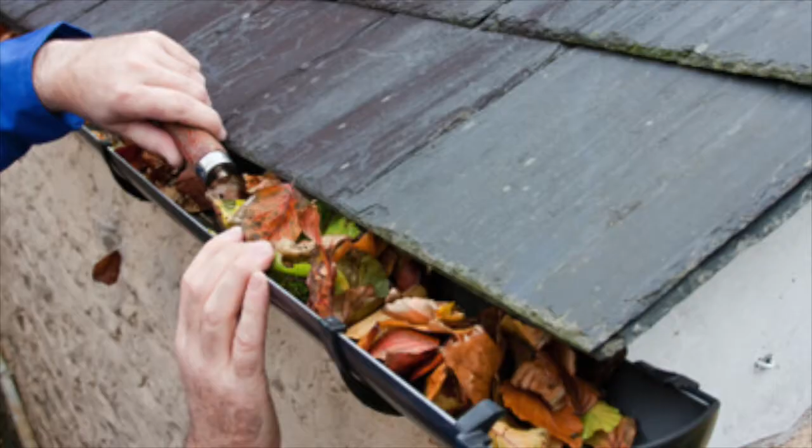Driving down the highway, we never stop to think what makes it possible for us to be where we are - the guide rails that keep us safe from oncoming traffic, the signs above us that guide us in traffic, or the very vehicles we're sitting on. When we're at home on our trampolines enjoying ourselves, when we see a baby walking around on a stroller, what supports them? What is it that modern things have in common that allows them to be what it is that they are?

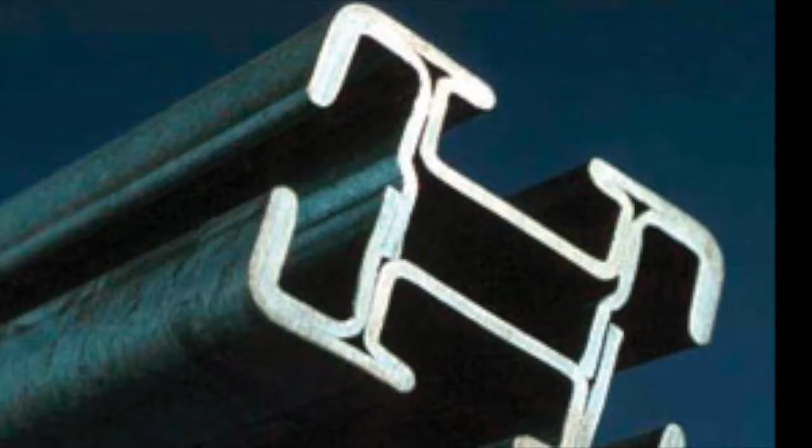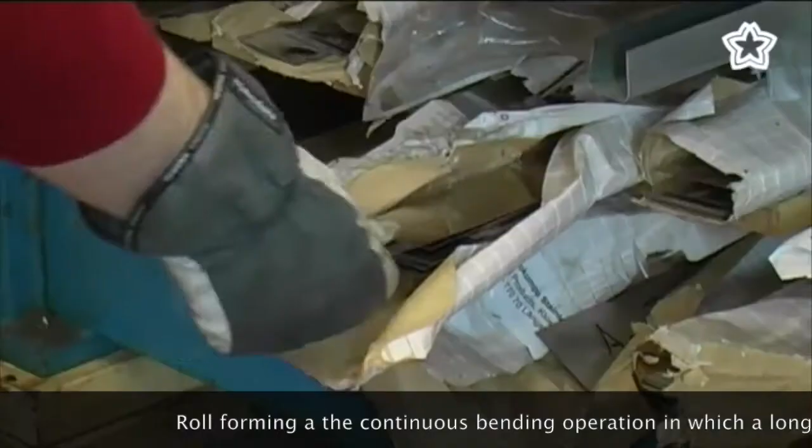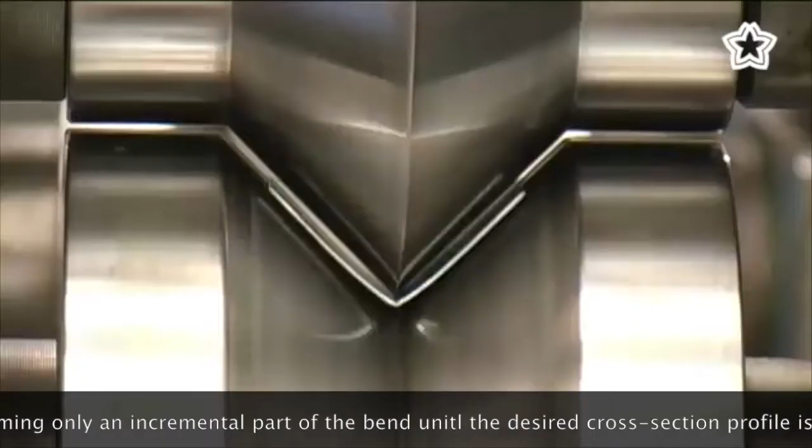Roll forming is a continuous bending operation in which a long strip of sheet metal, typically coiled steel, is passed through sets of rolls mounted on consecutive stands, each set performing only an incremental part of the bend until the desired cross-sectional profile is obtained.

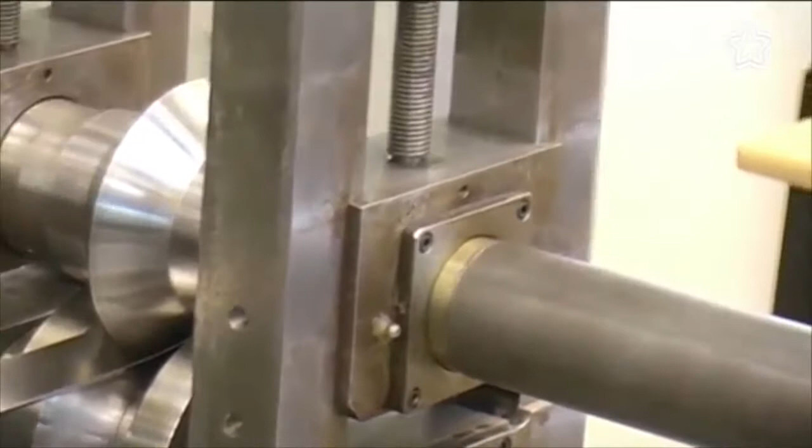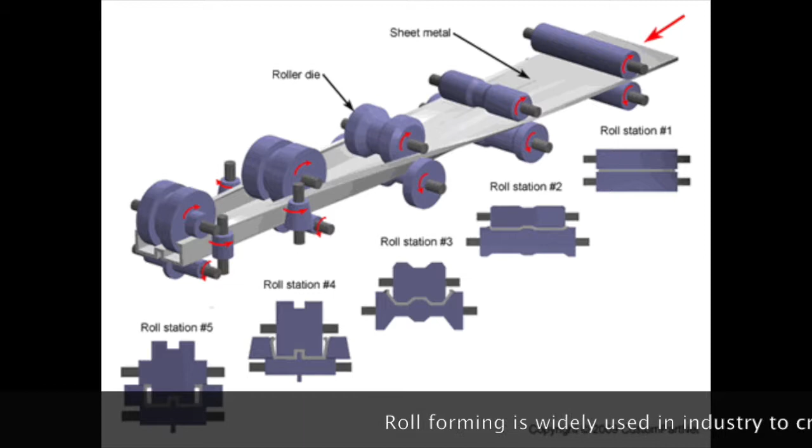Roll forming is widely used in industry to create parts that are long and have intricate and complex geometries.

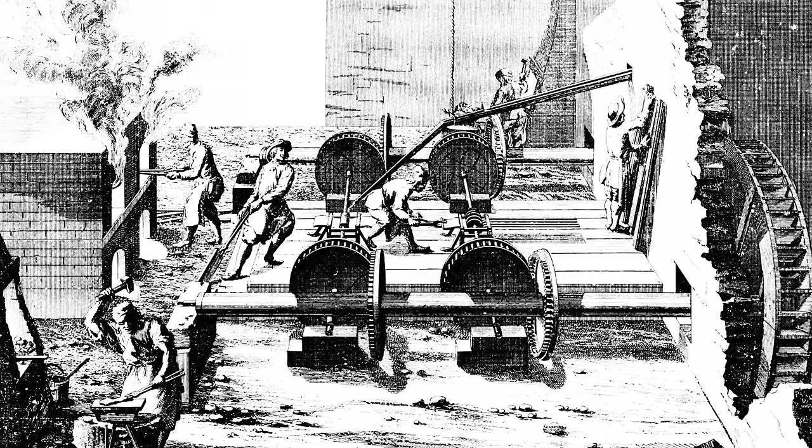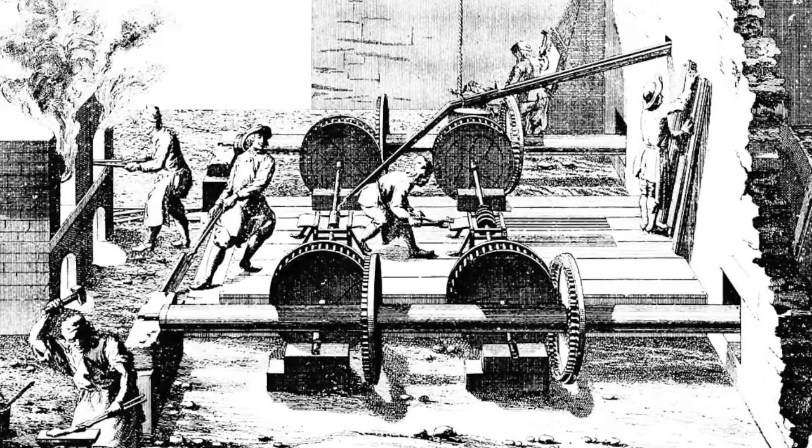The invention of the rolling mill is attributed to Leonardo da Vinci. Earliest rolling mills were slitting mills, which were introduced from what is now Belgium to England in 1590. These passed flat bars between rollers to form a plate of iron, which was then passed between grooved rolls to produce rods of iron.

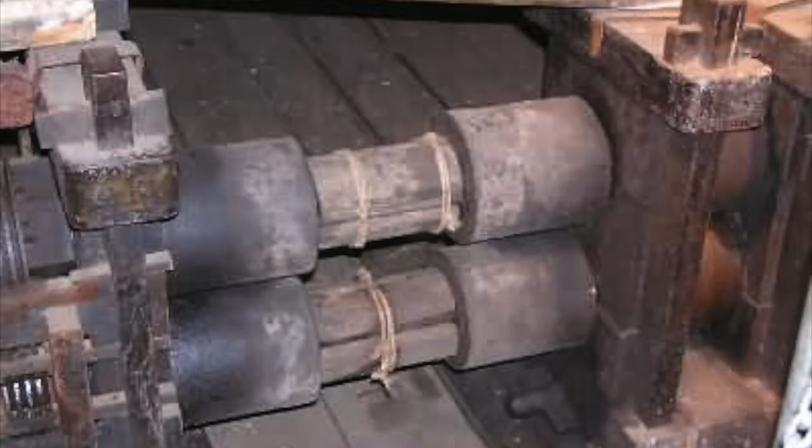However, the first laboratory rolling experiments only took place in 1670, and rolling has never been the same since. Modern rolling practices can be attributed to the pioneering efforts of Henry Cort. In 1783, a patent was issued to Henry Cort for his use of grooved rollers for rolling iron bars.

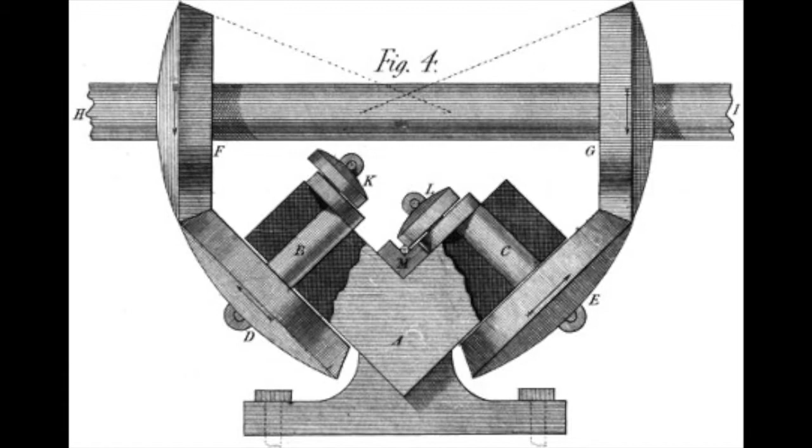With this new design, mills were able to produce 15 times the output per day than that of traditional hammers. Although Cort was not the first to use grooved rollers, he was the first to combine the use of many of the best features of various iron making and shaping processes known at the time, thus making writers call him the father of modern rolling.

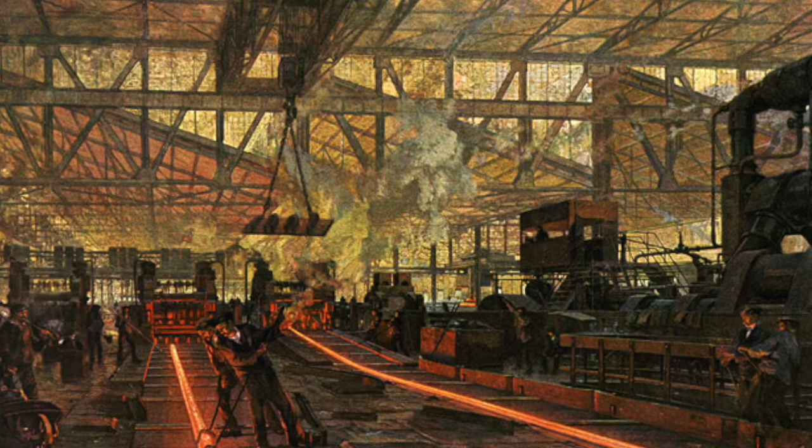The first rail rolling mill was only established in the 1820s by a man known as John Birkinshaw. With this advancement in technology, machines grew bigger and bigger very quickly.

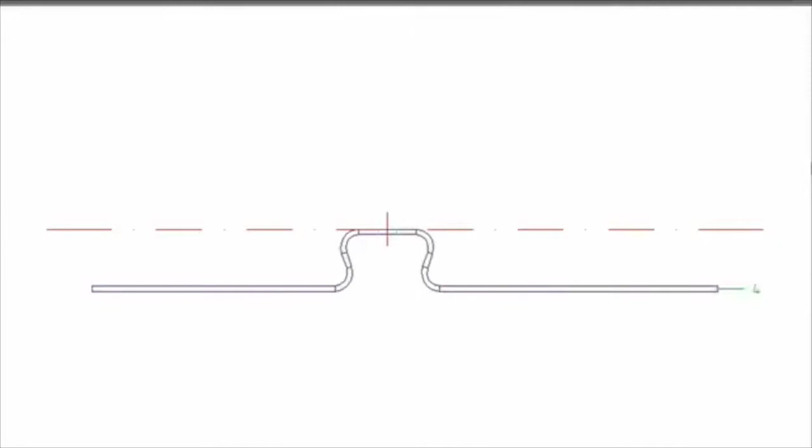Flower pattern is the most commonly used form of roll forming in modern manufacturing. The idea is very simple: small, incremental bends are applied to materials successively until the final shape is obtained. The order and magnitude of these bends is crucial in determining both surface finish and accuracy of the final part.

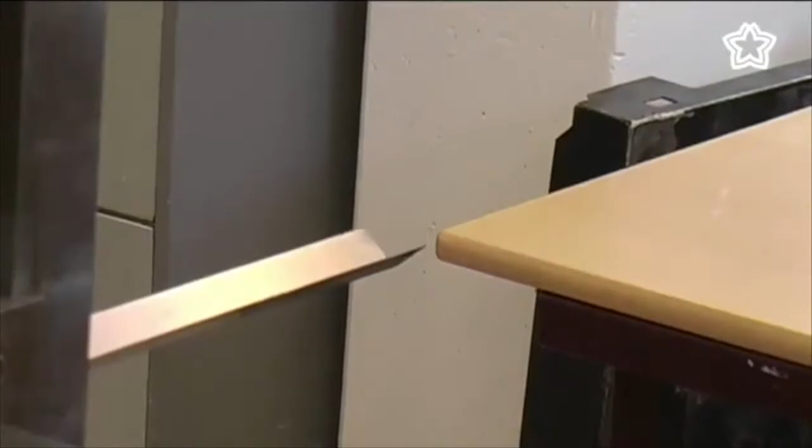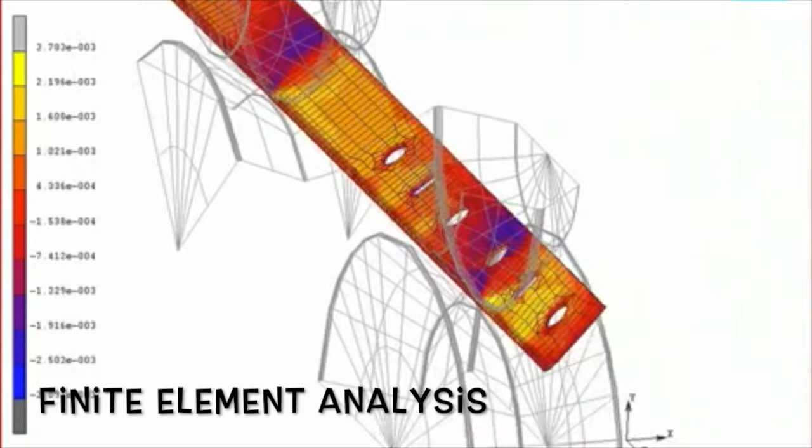In modern manufacturing, finite element analysis and roll forming go hand in hand. FEA simulations are used to determine whether certain patterns are feasible and whether or not successive rolls are either too aggressive or not aggressive enough.

As can be seen here, if successive rolls are not well designed, large stresses are placed on the material, deforming it in ways that are not desirable and can damage both part and machinery alike.

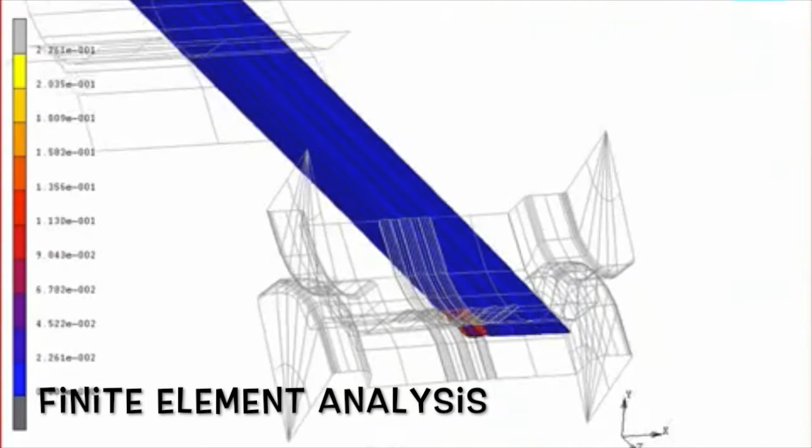Well-designed rollers generate stresses only when necessary and ensure that the surface finish is exceptional and that the part fits within spec, time and time again. This may require more rollers with very particular shapes and sizes, but it is much cheaper in the long run and creates a much better final product.

Remember the guide rails from the beginning of the video? Let's have a look at how they are actually manufactured.

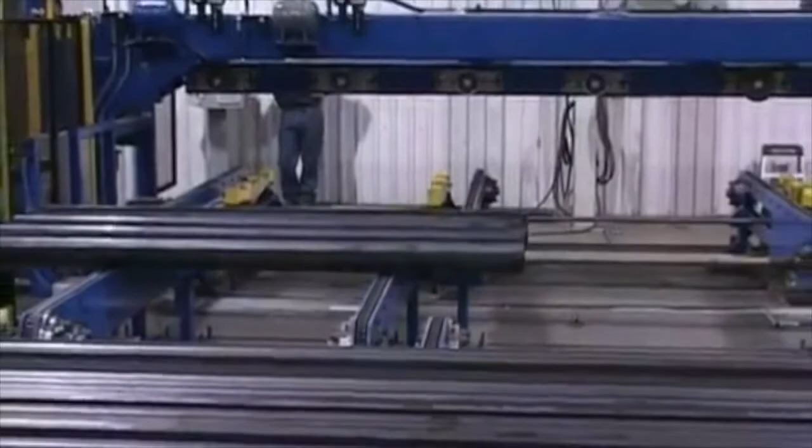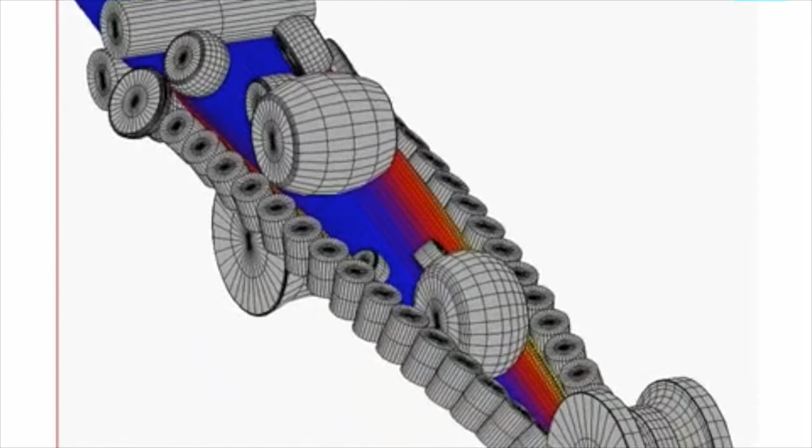Something most people are unaware of is that most thin-walled circular tubing is made using roll forming methods. This is because roll forming is much cheaper than punching or stamping or other equivalents and uses far less material. It also allows you to make tubes and pipe of any length and make them repeatedly and quickly.

Extrusion also allows for parts to be made of any length and dimension, but unlike roll forming, surface finish and part tolerance are significantly compromised.

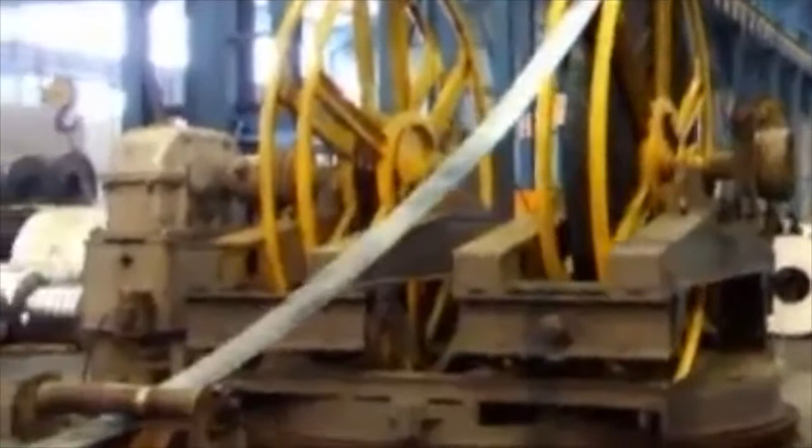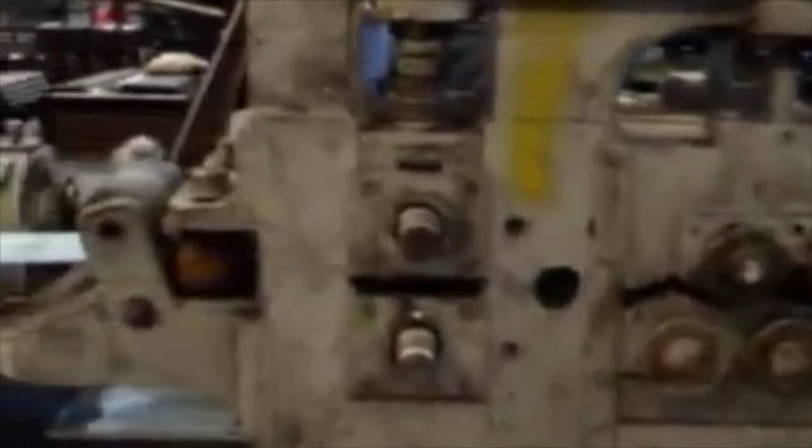Roll forming still remains the cheapest and fastest method to make hollow piping, gutters, vehicle guide rails, so on and so forth. This is a video of typical mass production thin-walled hollow piping.

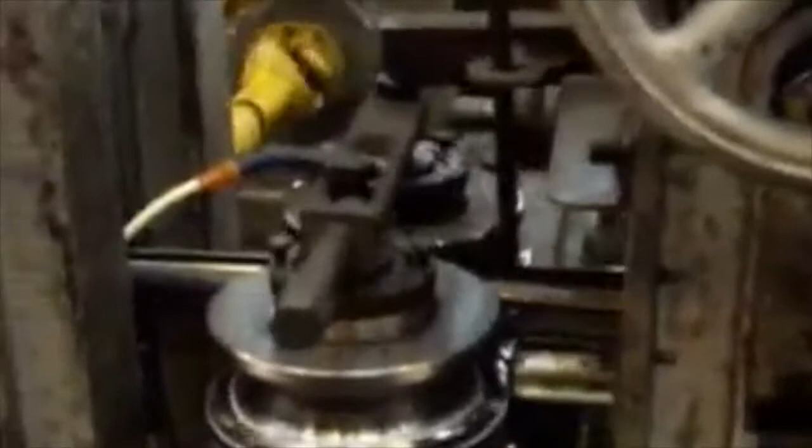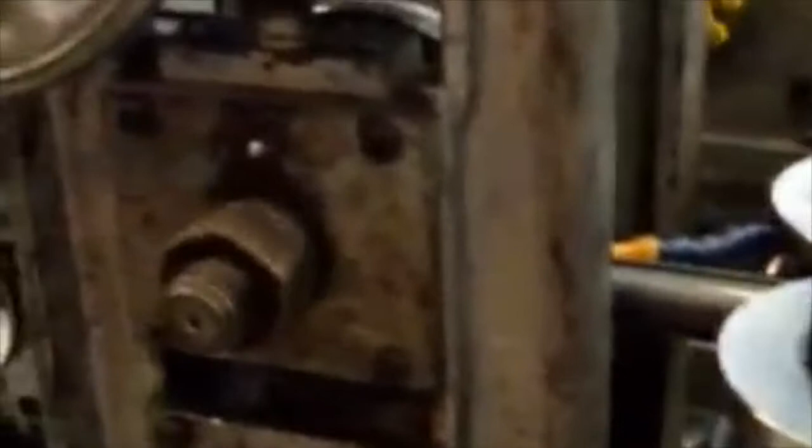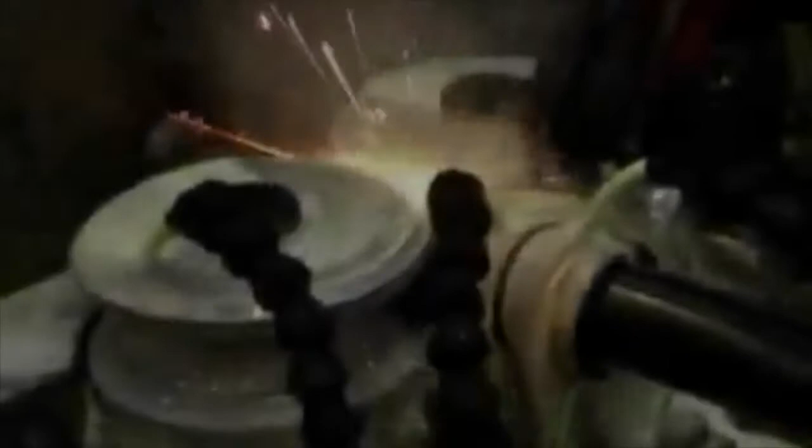Roll forming can be used in conjunction with other modern manufacturing practices such as spark and arc welding to create complete, finished, and high-quality products.

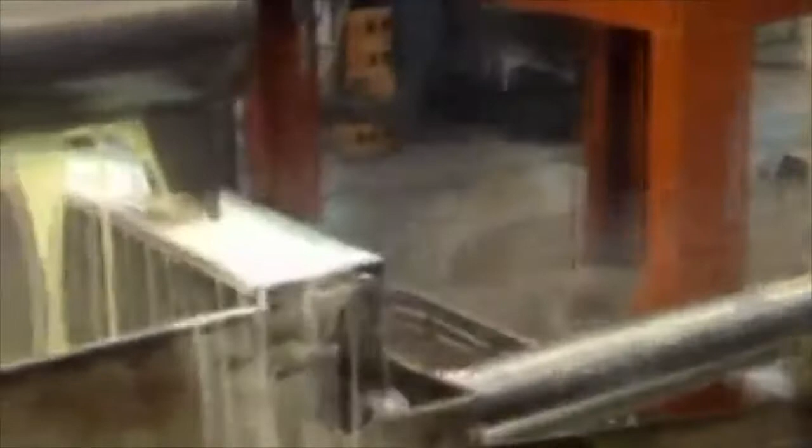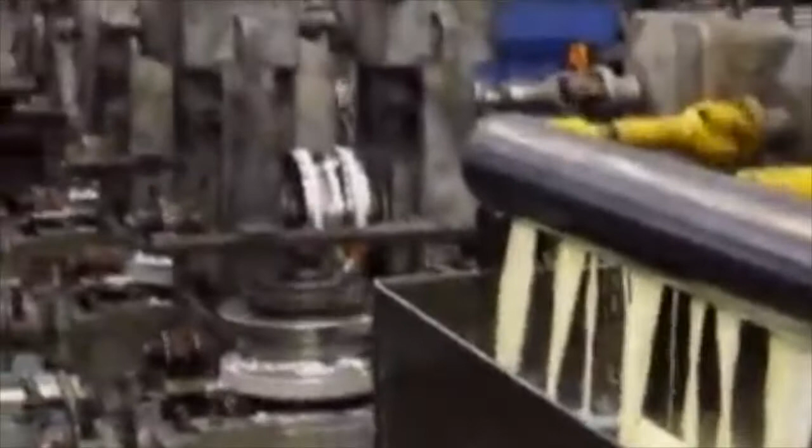Once an object has been rolled, it is typically cut to length by some sort of bandsaw or slitting tool.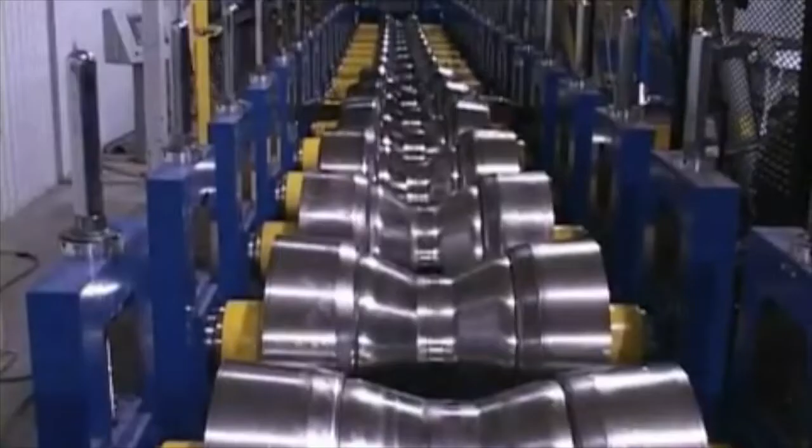Roll forming has a wide range of uses, which include but are not limited to embossing, threading, cutting, and shaping.

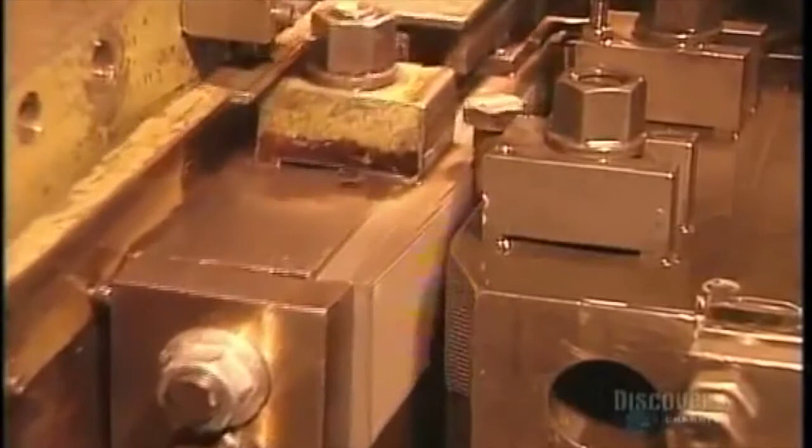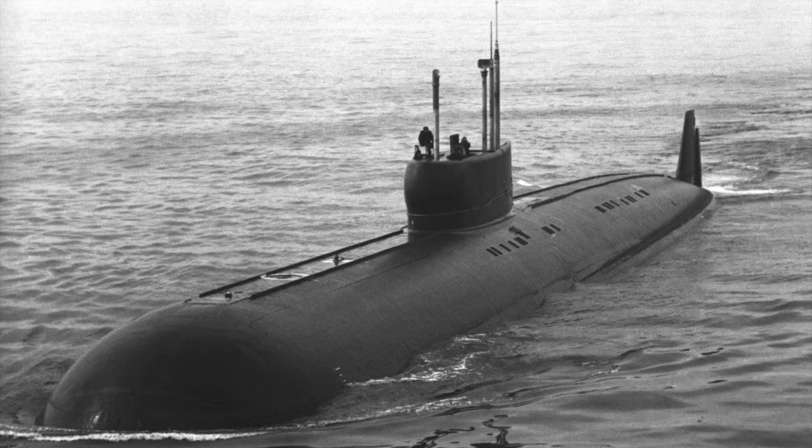Roll forming has completely changed modern manufacturing, and I hope from this video you are able to see that not only is it useful, but it is a method of production that is here to stay.